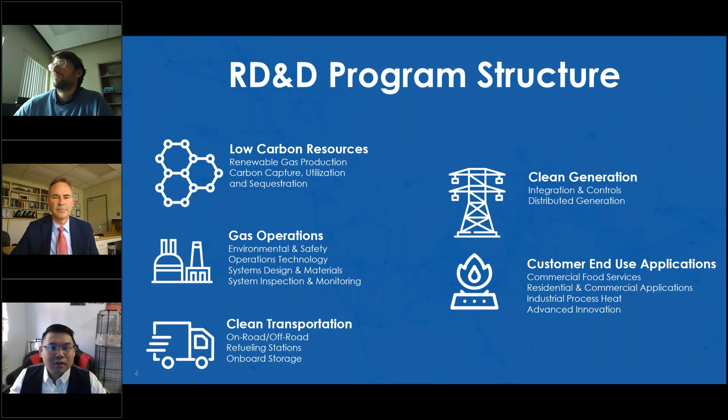In 2020, the SoCalGas RD&D team managed 386 active research projects. On average, RD&D projects generated a 6.9 funding ratio, meaning for every $1 of RD&D funding provided to a project, the project also receives nearly $7 of external co-funding. For example, already in 2021, 5 RD&D projects have been awarded about $15 million from the California Energy Commission and the Department of Energy.

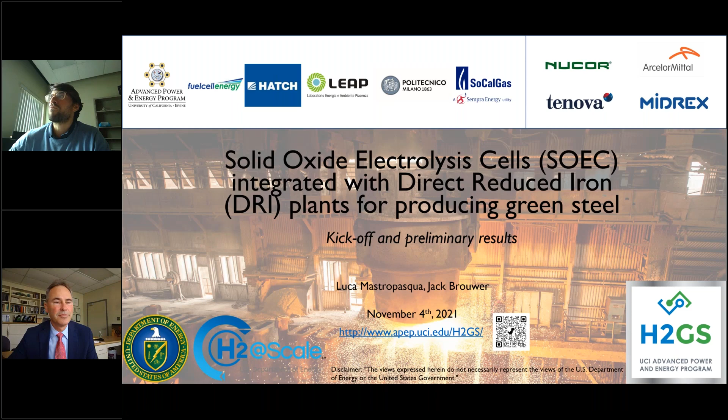We intend to reduce specific primary energy consumption to less than 8 gigajoules per ton of DRI product. We also expect electric-to-hydrogen efficiency for the SOEC stack of less than 35 kilowatt hours per kilogram of hydrogen produced. This is a very low number, achieved because of the integrated process we propose. And we will reduce the specific CO2 emissions rate to less than 90 kilograms of CO2 per ton of DRI product.

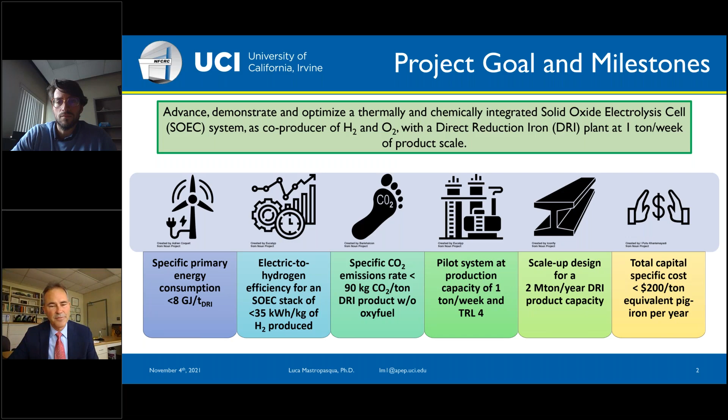This is what we proposed to the US DOE with our partners, including SoCalGas, and it's what we hope to deliver.

This would be very impactful because we know that from the perspective of direct industrial CO2 emissions, iron and steel production comprise almost one-third of all these emissions. 28% come from iron and steel. As a matter of fact, 6 to 6.5% of the total anthropogenic CO2 emissions in society come from the steel industry.

If you look at the traditional way of manufacturing steel using a blast furnace plus basic oxygen furnace, that's what BF plus BOF stands for, compared to what we propose — the two hydrogen routes, hydrogen direct reduction and hybrid hydrogen direct reduction — you can see very different performance characteristics. These include roughly halving the energy intensity, from 19 to 22 gigajoules per ton down to less than 8 or 9 gigajoules per ton, and a 20 times reduction from 1.8 to 2.1 tons of CO2 per ton of crude steel down to less than 0.1.

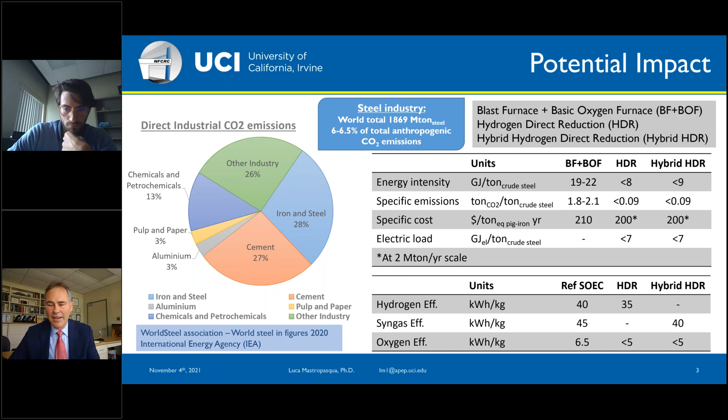So what are we doing in this particular project? We know that we have a lot of emissions, around 7% of the global anthropogenic emissions of CO2 that are due to the steel industry. And there is expected to be more steel, not less steel, manufactured in the future. As a matter of fact, a 20% increase in steel production is projected by 2040, primarily as countries increasingly industrialize and improve their quality of life and economic status.

We've talked about these numbers before, the energy intensity that we hope to drop, but there are a couple of ways you could possibly decarbonize the iron and steel industry, and that's what I'm showing on this chart. We can see that the traditional way of making steel using a blast furnace plus basic oxygen furnace could be complemented by carbon capture and storage, to take the carbon emitted from this process, capture it, and then sequester it.

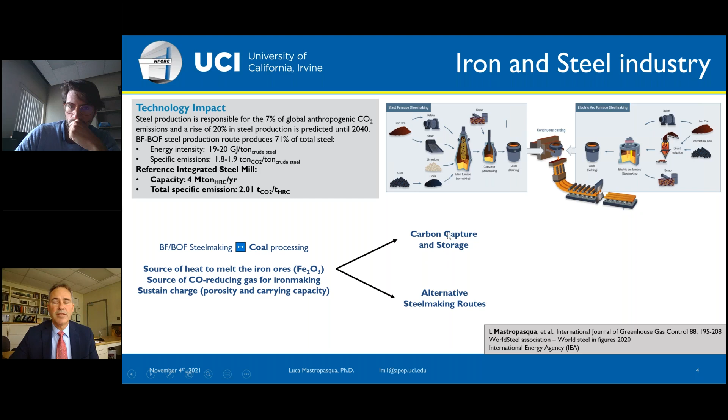We, on the other hand, are proposing an alternative way of making steel. Instead of making it through blast furnace plus basic oxygen furnace, we would like to make it through this direct reduced iron process.

Now there are a couple of other projects internationally. One that we note here in Sweden is called Hybrit. They are investing $51.8 million to integrate a proton exchange membrane electrolysis system with direct reduced iron to advance another method for alternative steelmaking routes.

We also have a project from ArcelorMittal in Hamburg, Germany, where they're demonstrating a novel DRI plant. And then there's a ThyssenKrupp Steel grant that was recently awarded in 2019 that is also similar to the kinds of things we are doing.

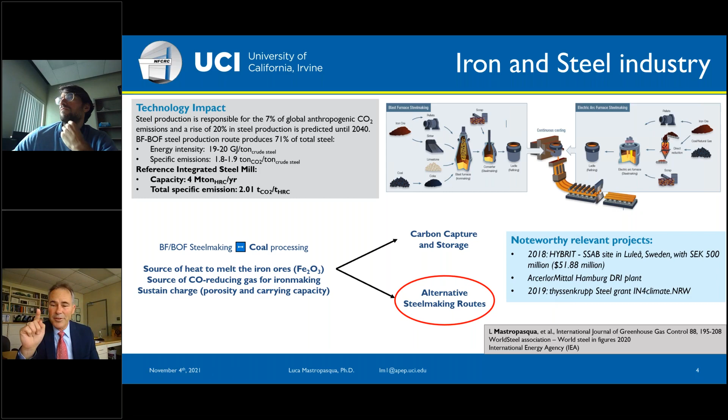Ours is novel, though, from all of these, because we are integrating this kind of direct reduced iron plant with solid oxide electrolysis.

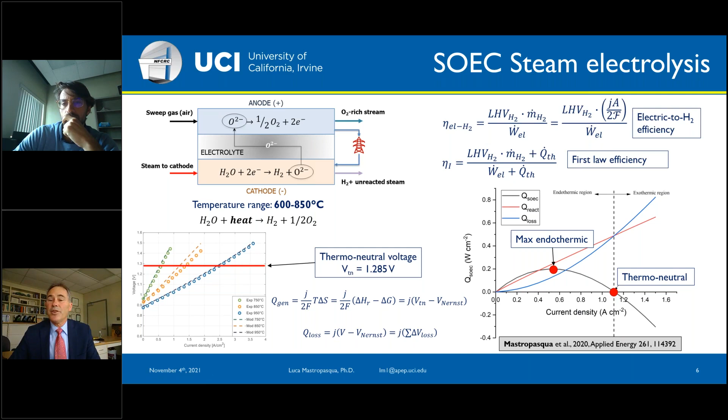Now, the maximum endothermic point is right here, where you can see the peak of endothermicity, and then we have thermoneutral here. And of course, the electrical efficiency is what is improved if we can operate in these endothermic conditions and use heat instead of electricity to make the hydrogen.

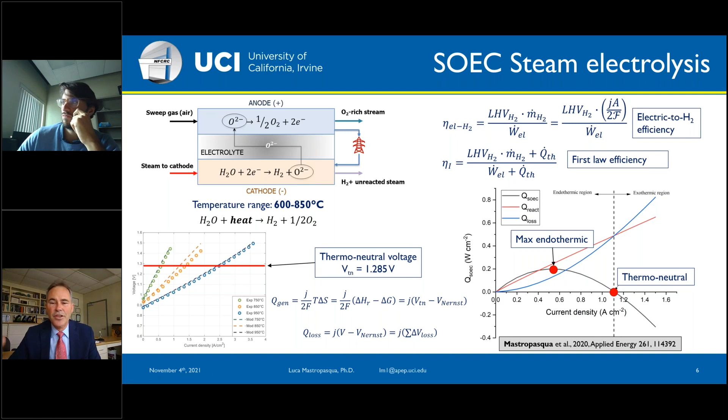Now the state-of-the-art solid oxide cell could be integrated. State-of-the-art in DRI is to use natural gas. This is in contrast to what we are suggesting, where we are going to use a solid oxide cell that has renewable electricity and renewable heat as an input, to co-produce hydrogen and oxygen.

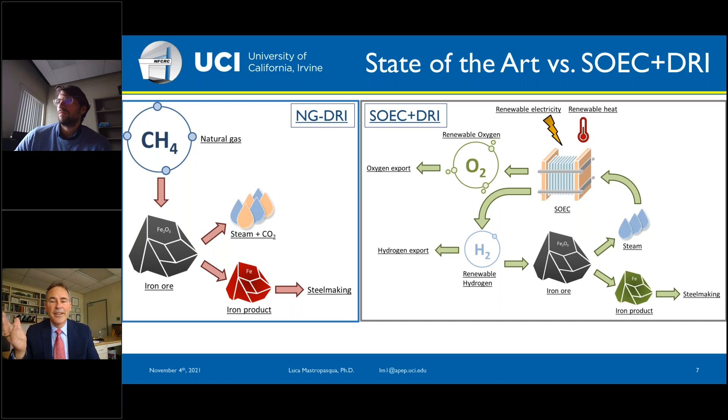So instead of using natural gas in the traditional DRI plant, we are using hydrogen to do the reduction of the iron, making green steel because there's no carbon that comes out from the process, but also having oxygen that can be used in other parts of the plant and for other end uses.

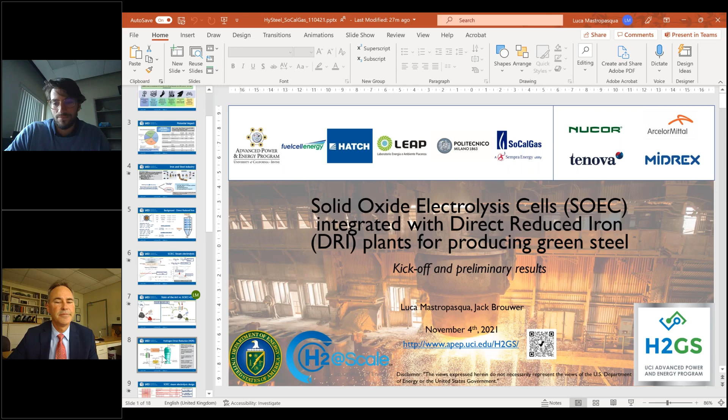Luca? Yes, can you hear me? Yes. Do you want me to share? Yeah, please share your screen. Okay. We saw it for a second there. Can you see it now? Yes, looks good. Okay, all right, I'll continue here.

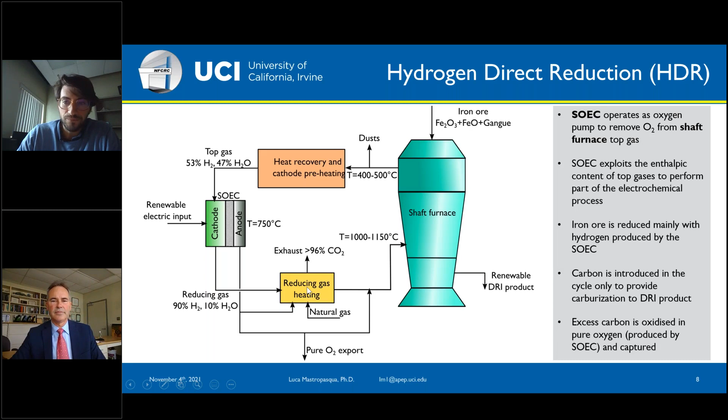So in order to understand how the SOEC operates in these particular conditions, which are definitely not conventional compared to simple hydrogen production, we are modeling these systems both in terms of system integration and the SOEC specific model. So at UCI, we have this dimensional model that allows us to understand what happens inside the SOEC.

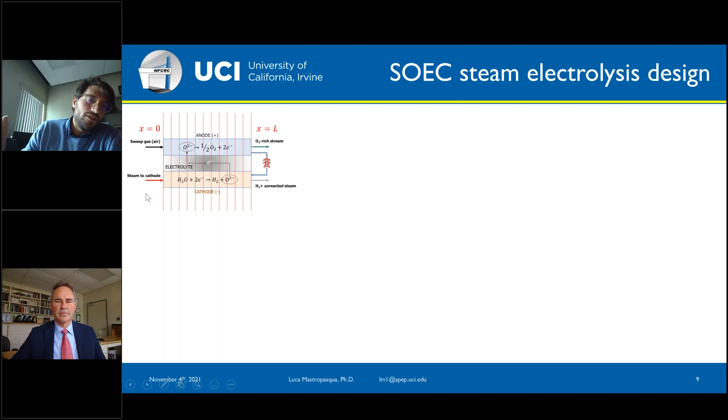When we operate the cell in the particular conditions for integration with the DRI, what we do is discretize the channel of the SOEC into many small pieces to understand how the hydrogen production occurs in a dimensional fashion.

So these, for example, are preliminary results of our dimensional model, where you can see on the left-hand side the profile of current density along the length of the channel. Note that this y-axis is negative, so we have an increase in current density up to about 60% of the channel, and then the current density will decrease towards the outlet of the channel.

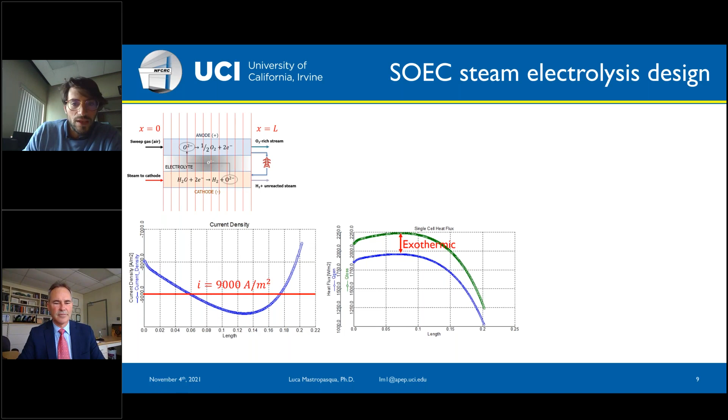And we have designed this cell to operate at around 0.9 amps per square centimeter on average. So despite that average, the dimensional variation is as reported here. And this chart on the right shows the concept that Jack was describing earlier, where we have the electrochemical losses, thermal power produced by the electrochemical losses, which in this case are lower compared to—sorry, the other way around.

The endothermic generation from the electrochemical reduction of steam is lower compared to the thermal power of the electrochemical losses. So this particular configuration shows an exothermic operation of the SOEC, and you can see that from the cell voltage, which is slightly higher than the thermoneutral voltage that Jack explained earlier.

We have, in this particular configuration, a steam utilization of 85%, meaning that we are converting 85% of the inlet steam into hydrogen. That means, from a system perspective, that a certain amount of oxygen is also produced, and the steam utilization of the SOEC will be correlated to the conversion of iron ore in the shaft furnace, because the oxygen balance has to close as well.

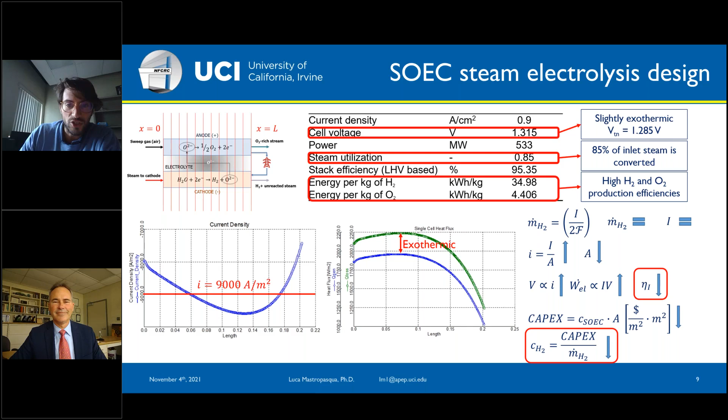In terms of preliminary thermodynamic performance of the integrated system, as mentioned earlier, we are planning on targeting 0.85% carburization in the final DRI product, and greater than 96%, in this case 97.5%, metallization in the final product.

The preliminary analysis we have conducted shows that the primary energy consumption of the HDR case, meaning the renewable energy electric input plus the natural gas needed for preheating and to supply carbon to the final product, ranges between 7.4 and 8.3 gigajoules per ton of the final DRI product, considered hot.

In terms of CO2 emissions, the range associated with the consumption of primary energy is between 40 and 60 kilograms of CO2 per ton of DRI.

These preliminary thermodynamic results are in line with our expectations, and we are exploring different configurations to integrate heat recovery and minimize natural gas consumption. So more is going to come in terms of system integration in the future.

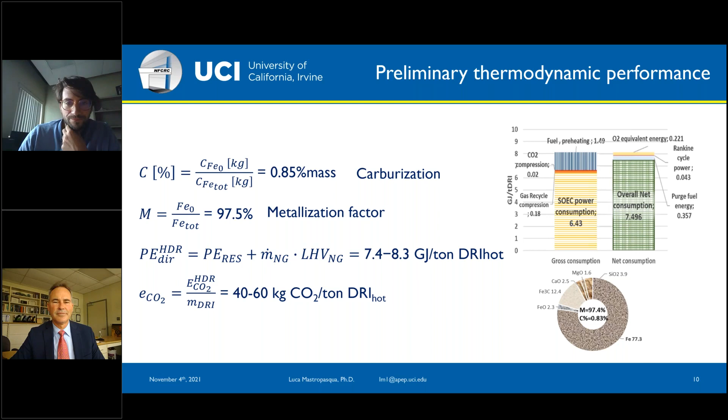Now I would like to mention the possibility that Jack touched upon earlier, that SOEC can operate in coelectrolysis mode. This is the same picture we showed earlier, with the difference that on the cathode side we can feed not just steam, but also CO2. So CO2 can be electrochemically converted in the cathode of the SOEC to produce CO. At the outlet of the cathode, we would then have a renewable syngas comprised mainly of hydrogen and CO.

This is also quite interesting. As you can see on the right-hand side of the screen, if we increase the temperature, the coelectrolysis reaction becomes advantageous to operate at high temperature, for the same reason we discussed earlier for steam, as we can reduce the amount of electricity input at the advantage of increasing the amount of heat input.

The fact that we can electrochemically reduce CO2 allows us to include some carbon into that loop between the DRI furnace and the SOEC. So the schematic becomes different from the schematic we showed earlier.

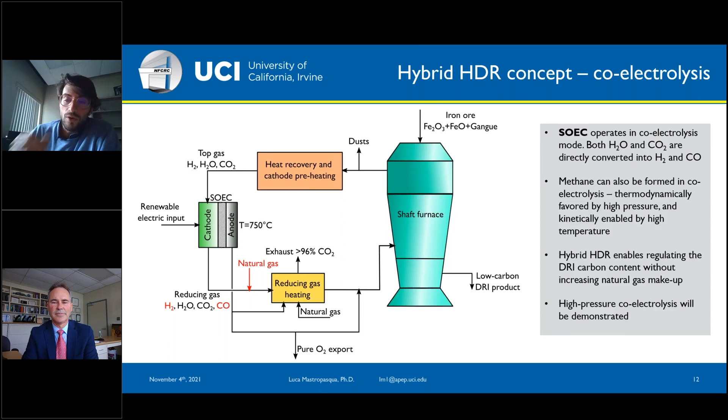So how are we going to demonstrate this? As of now, we are planning on reaching TRL 4, technology readiness level 4, using a so-called hardware-in-the-loop configuration, where we will have real hardware of the SOEC system. On the left-hand side, you can see we will have a SOEC system deployed in the lab of Fuel Cell Energy in Danbury, Connecticut.

It's going to be a containerized solution that will be measured with all sorts of physical sensors, and we will provide electric input and all the operating conditions required based on our system simulation.

The hardware is then going to communicate with a DRI simulator that is going to actuate actuators to supply the top gas, the resulting top gas from the DRI hydrogen DRI kinetics, to the SOEC. So the loop is going to use this hardware-in-the-loop configuration, where the DRI is going to be simulated with a real-time model that talks back to the SOEC stack.

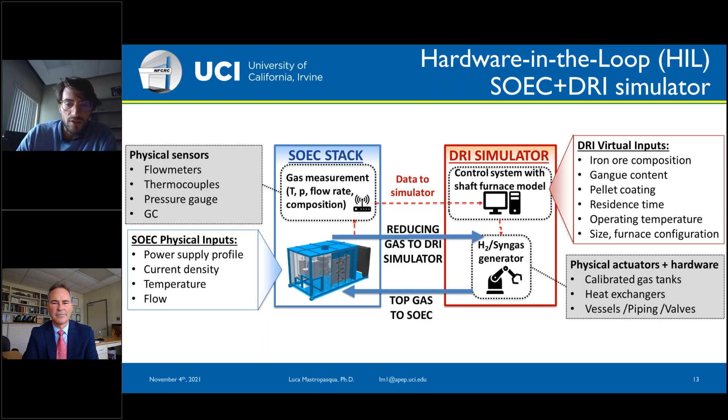And this is the final demonstration of the project, which is going to take place towards the end of the third year of our effort.

Just a couple of words on the demonstration system itself. Fuel Cell Energy, our partner that is going to develop the SOEC module, is based in Danbury, Connecticut, and they already have pressurized stacks. This is one example of the stacks we're going to use.

This stack is going to be placed inside a pressure vessel that is able to operate up to 8.6 bar. And the pressure vessel is going to reproduce the exact conditions we are going to simulate with the thermal integration with the DRI system.

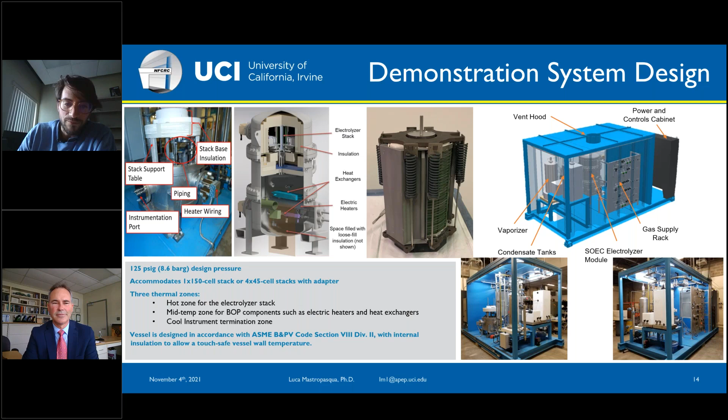As you can see, the final SOEC module is going to be containerized in such a configuration, and so we hope that as a follow-up to the project, this system can be deployed or shipped into an industrial site to demonstrate this concept in a real industrial application.

In terms of follow-up or future work, the project is divided into 5 technical work packages, and we've mainly talked in this presentation about the first 2. The first work package is system integration and thermodynamic analysis, for which LEAP, our Italian partner, and Politecnico di Milano are primarily responsible. The second work package is the design of the SOEC module, which we at UCI are primarily responsible for, and I've shown you some of the results we've obtained.

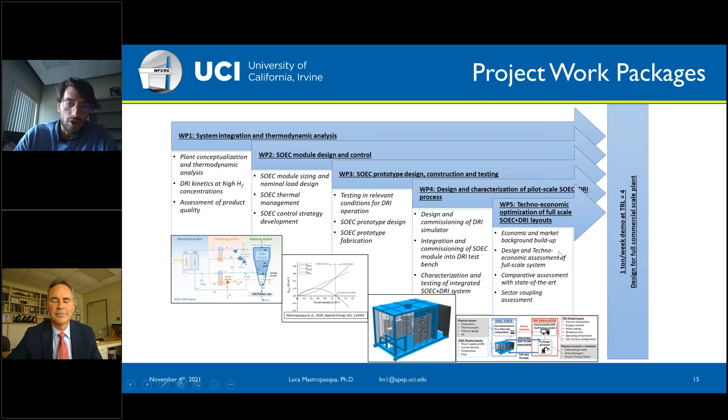The third work package is Fuel Cell Energy's responsibility, mainly the testing and design of the prototype and construction of the demonstration unit. The fourth work package is where we put everything together in terms of demonstration of the pilot scale system, building the hardware-in-the-loop demonstration and coupling the hardware SOEC module with the real-time DRI simulator. The fifth work package, which Hatch will primarily be responsible for, is the scale-up of the demonstration unit to a commercially relevant scale to meet the economic targets of the project.

This is just a summary of all of our collaborators and primary responsibilities. We also wanted to point out that we are working actively with industrial advisors to the project, meeting with them regularly in order to not lose focus of what's really important for the industry.

In summary, I want to conclude that as of now, we have been able to demonstrate with modeling activities that we can reduce the primary energy consumption of steel making by more than 64 percent.

Oh, I've lost—can you still see my screen? Keep going, I cannot see my screen anymore.

Well, I can continue then and say that we have been able to show that we can thermally integrate these, chemically integrate these, and achieve really substantial goals, like a 20 times reduction in CO2 and a substantial reduction, almost halving, of the primary energy consumption.

We also are showing that we can— oh, now you stopped sharing? Sorry.

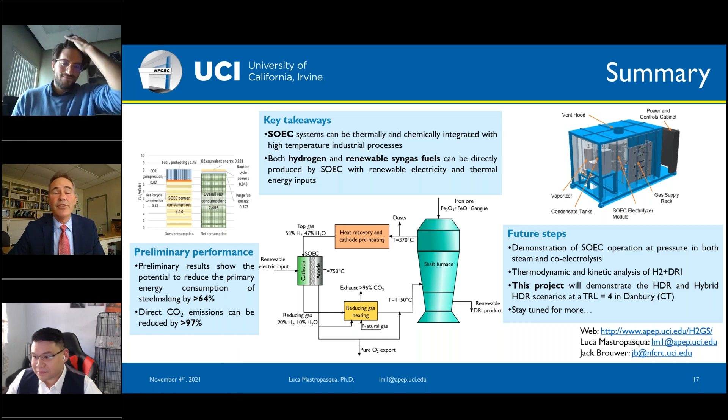We're also showing that both hydrogen and renewable syngas fuels can be integrated in this way if you use solid oxide electrolysis cells. And there's no one else in the world doing anything like this except for us and our team to decarbonize and reduce primary energy consumption, making green steel using solid oxide electrolysis cells and systems.

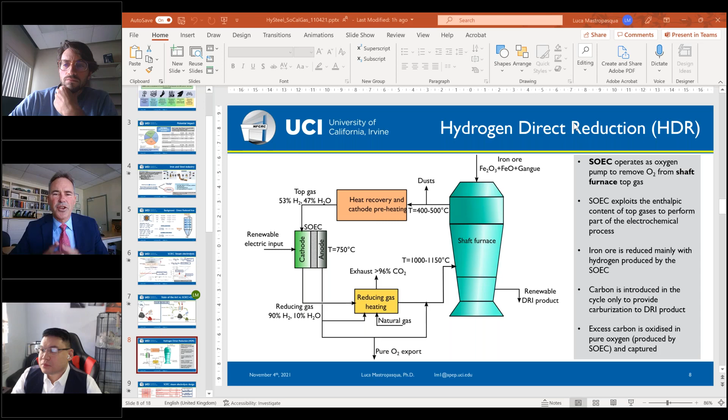Well, so what's the trade-off? Yeah, so we could possibly show the slide. Are we showing slides here? Yes, I see the slide being presented. So Luca, if you go to that slide where we show thermoneutrality and endothermicity, that might be nice.

However, on the opposite side, where it is endothermic, continuing to reduce the current and adding some heat to the process improves the electrical efficiency. So as we go to lower and lower current densities, we can improve efficiency, but you have to start adding heat once you get close to the thermoneutral point. So that's the trade-off: if we have heat available, let's use it and get close to thermoneutral or even below it. That's the trade-off.

Great explanation, and the presentation is excellent. Thank you so much, Dr. Brouwer and Luca, for the fantastic time with us. You're welcome. Thank you for your question.